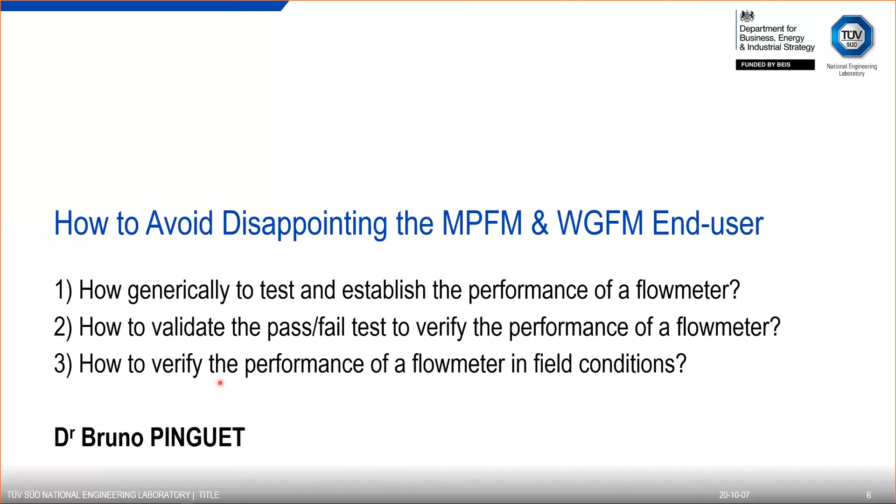So as Marietta said, I will introduce myself. I've been in this business of multi-phase for the last 30 years, and I've had two professional lives: 26 years with one company, and 4 years with NEL right now. Before going further, everything that will be said today, if there is some mistake, it's my fault. It's definitely not something related to TÜV SÜD. It happens that I make mistakes.

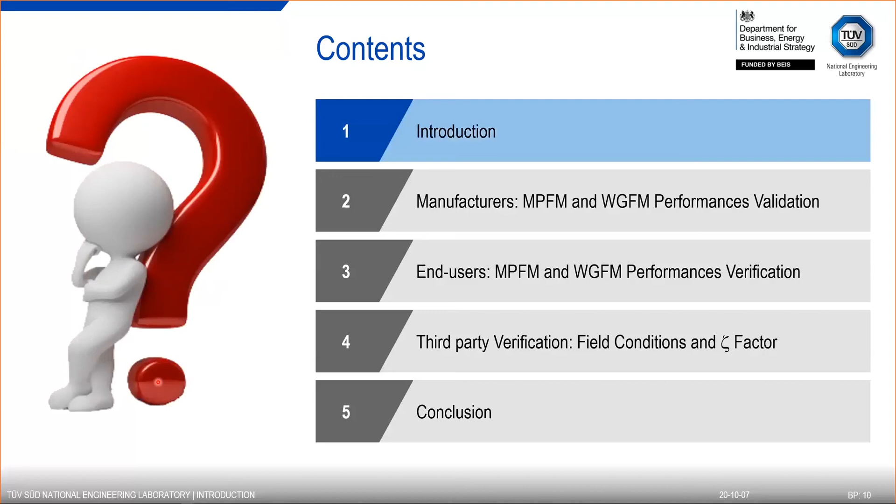So I have three main topics. One is what the manufacturer should do in order to establish the performance of a multi-phase flow meter or wet gas flow meter. Very often I will use multi-phase flow meter, and sometimes you will see MFM, but it's either one or the other. The third bullet will be for the end user, and after that we look at the verification in the field and then a conclusion. So let's go through the first part and an introduction.

The first question you may have is, why do we need to test a multi-phase flow meter? It could be well established like a Coriolis or some other equipment. Unfortunately, multi-phase flow meters are small equipment in general; they compete against a separator and need to be more compact. Inside this small space you have a lot of technology: electromagnetic, nuclear, electrical, optical, all combined together, and it's far from easy to understand the entire system, how it can deviate, or establish a proper propagation of error. So you will need to do a test one way or another.

Convinced or not, you can take it a different way. For example, there is an ISO standard associated with the Venturi, ISO 5167, but it's related to one phase and not two or three phases like you have in multi-phase. Same story with the Coriolis. It was developed for one phase, tested and improved for two phases, but in some cases we have three phases and people try to make the Coriolis work for three phases. So sometimes it's not new technology combined together, it's very well-known technology extended beyond its normal conditions.

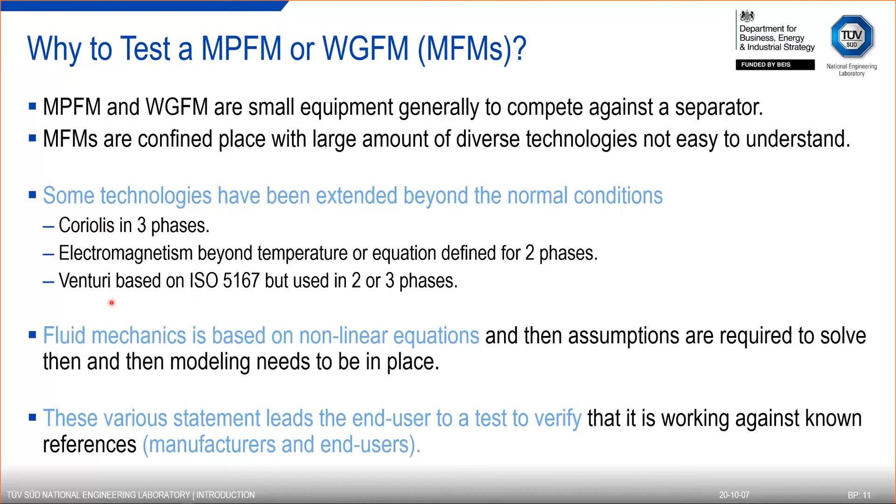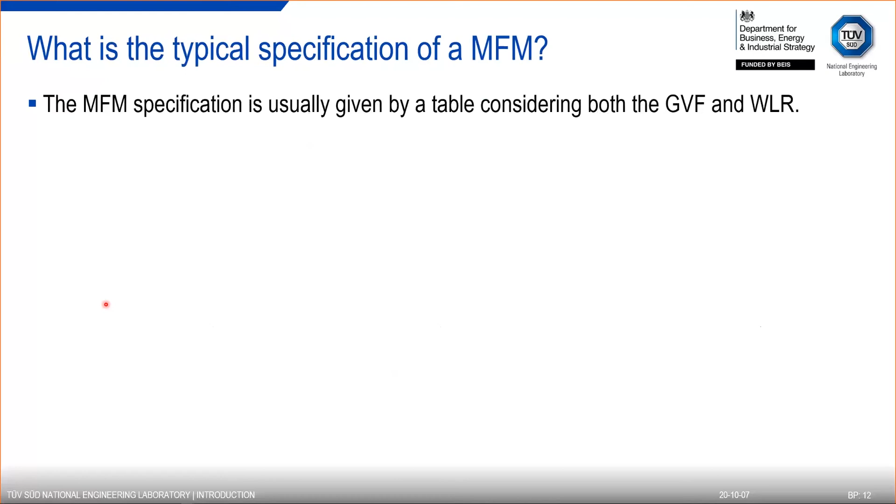So the specification of a multi-phase flow meter will be established by having some range of gas volume fraction, GVF, which we may see again in my slides, and water liquid ratio, WLR. Following the range of these two parameters, they will be able to establish a performance, let's say, between 20 and 30% GVF and between 50 and 100% WLR. The specification on the oil flow rate could be 5% or something like that.

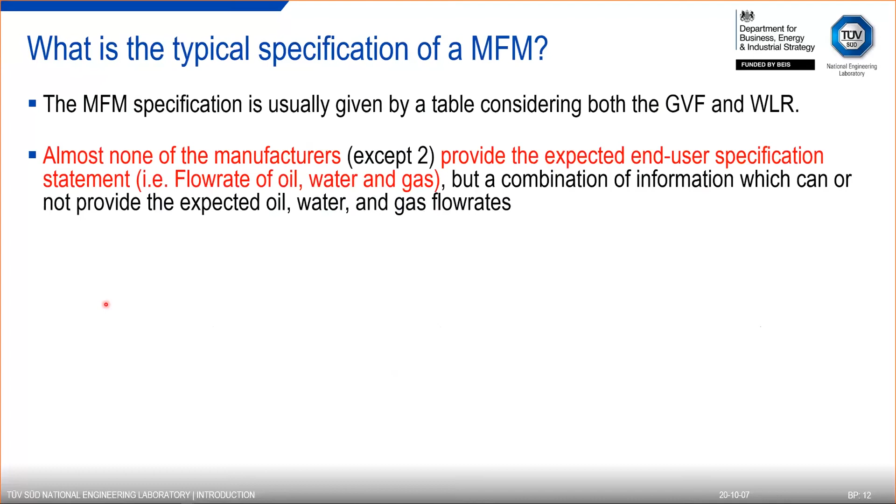Unfortunately, what I was telling you is far from right. Most of the manufacturers on the market today are not giving the specification the end user expected. The end user wants what? The oil flow rate, the water flow rate, and the gas flow rate. This is what is used with a separator, and this is how the allocation is done. Unfortunately, for some reason that we will not discuss here, manufacturers are giving a combination of parameters, and the end user will need to establish the proper statement in terms of oil, gas, and water flow rate.

I show you some types of specification. I'm listing here four of them, which are quite well known among all the manufacturers on the market today. As I said, there are only two, as far as I can see, which are providing the gas, the water, and the oil flow rate as expected. I call them type 1 specification. Type 2, which is a larger one, is based on gas flow rate, liquid flow rate, and water liquid ratio. Type 3 is gas flow rate and a mass of hydrocarbon. We need to be careful here. We're talking about a mass, and we have the water volume fraction, and we have type 4,

and we have type 5. I show you here how you need to do the calculation if you want to get access to the oil flow rate, gas flow rate, and water flow rate if you were with a type 4, for example. So you will need to get access to the density of oil and the density of gas, and manipulating the specification given by a manufacturer, you will be able to access the statement that you want.

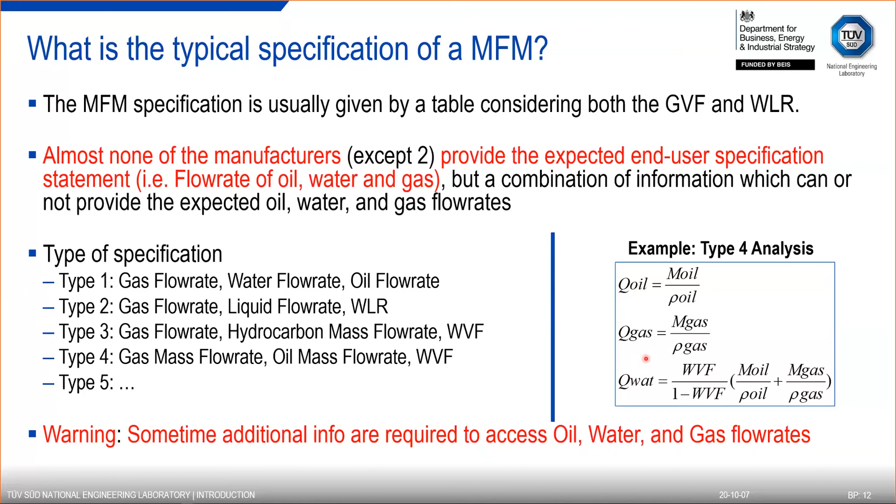So how does a multi-phase flow meter work? All these multi-phase flow meters, even if they are complex to understand, are based on the same concept. You will need to have some information to set the meter. It could be the salinity, the density of oil, the density of the water, the density of gas, and obviously the pressure and the temperature in order to be able to do the conversion from standard or ambient condition to line condition. And then you will have some other information.

Very often you will have the differential pressure measurement. Most of the manufacturers on the market today use a Venturi in one way or another. Some may use a Coriolis. In this case, it's slightly different, but these are all the input parameters that you will have. So this is what we have on the left side of this slide. And we need to achieve this for the end user, which is a flow rate at standard condition. And how do you go from the left to the bottom right?

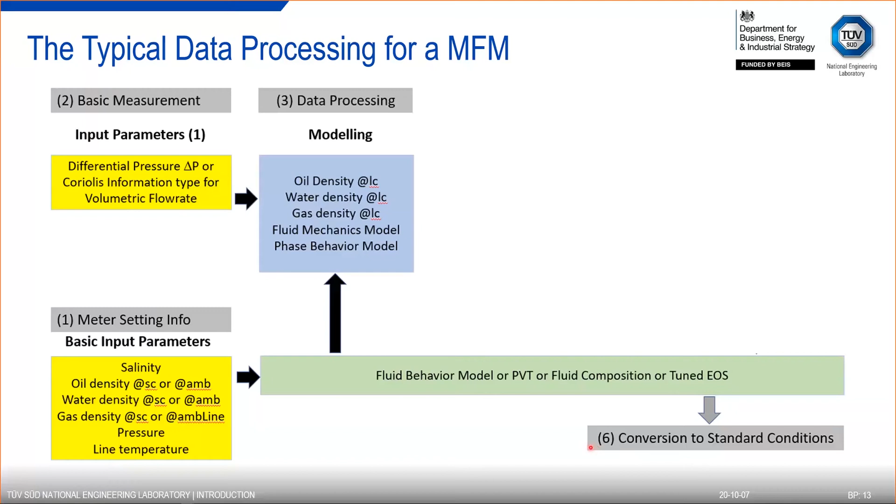It will be obviously by combining the information that you have, converting it to line condition. So this is a bit of data processing. Each manufacturer will have his own model for the fluid mechanics. You need to use some equation of state or phase behavior, like I said here, and then by crunching these things you will be able to get access to the flow rates at line condition: mass flow rates, liquid, gas, and so on. It depends on the technology that you have and how they combine them.

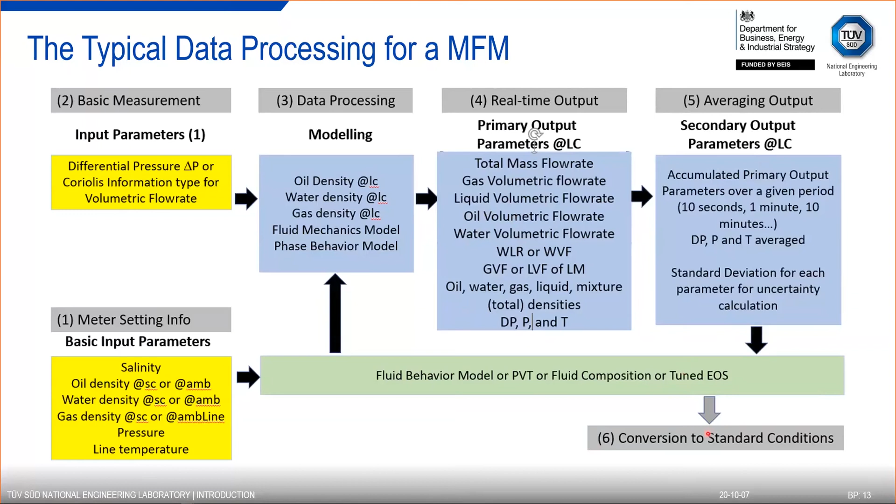And then there is an averaging to do, obviously, because the data acquisition frequency will be quite high to be able to handle the type of fluid passing inside your pipe, which is quite often unstable flow. You do this averaging, and then you will use an equation of state again to do the conversion to standard conditions. So this is what you need to have in mind when we are talking about a multi-phase flow meter or a wet gas flow meter. So the next thing the manufacturers want to do will be to establish the uncertainty of this equipment.

So how do we establish the uncertainty of an equipment? The first thing is we need to understand that an uncertainty should be based on 2 variables. I'm taking here the gas flow rate, it will be based on an error on a percentage of the reading. So let's imagine here I have been calculating and reading X, which is a value of gas flow rate, I will multiply it by this specification or this uncertainty in percentage, and this will give me a number, or it will be an absolute value. It will be always one or the other.

The differential pressure measurement is based on the same techniques. So I give you an example here. For example, in this case, let's imagine we have a relative error of 3%, which is a statement made by a manufacturer, and we have a cutoff at 5 cubic meters per hour, and the gas flow rate will be the max of one or the other.

Very, very often, when I'm auditing equipment, I see that this one is missing here. There is always a suspicion when I see these things. It means for me that this equipment has not been tested on the full range that probably it's claimed by this manufacturer. There will be always a cutoff somewhere, especially when you go to the low value, in this case of gas flow rate. You cannot maintain an uncertainty of 3% on the full range, and you need to have this kind of cutoff.

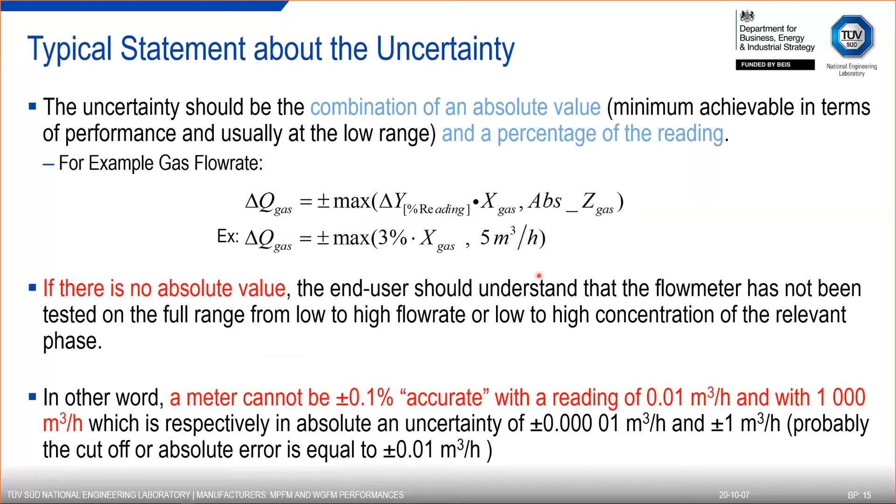This is what I'm saying with these last bullet points on this slide, where I say, let's imagine that I have a flow rate between 0.01 cubic meters per hour and 1,000 cubic meters per hour. And if someone is claiming 0.1% accuracy, or uncertainty is the right word here, it means that he is capable to have an uncertainty of this value for one case and this value in the other case. And you can see that these numbers are way too different, and this will never happen. Okay. So keep in mind, when you develop a specification, you should have a cutoff, and essentially this cutoff is for low flow rate.

Now, we have established how we should write this specification or this uncertainty, and what are the ingredients that we'll need to use to establish this uncertainty. And there are few of them, and the main ones, the 8 of them, as I mentioned here, are here. You need to take into account the repeatability of your equipment, and we will see a bit later why it's so important to have information about the uncertainty associated with the repeatability. We have the reproducibility. We have a stability, and this is something that you build over the time.

You may have a bias. Obviously, if you develop correctly the system, the bias will be zero. There will be a drift that will happen in your system over time, and there is also a way to handle it. There is a resolution on the equipment that you are using. Very often today, the resolution is extremely good, so this number will be close to zero most of the time. And you will need to take into account the uncertainty and the stability of the equipment that you are using to establish the uncertainty on your multi-phase flow meter or wet gas flow meter.

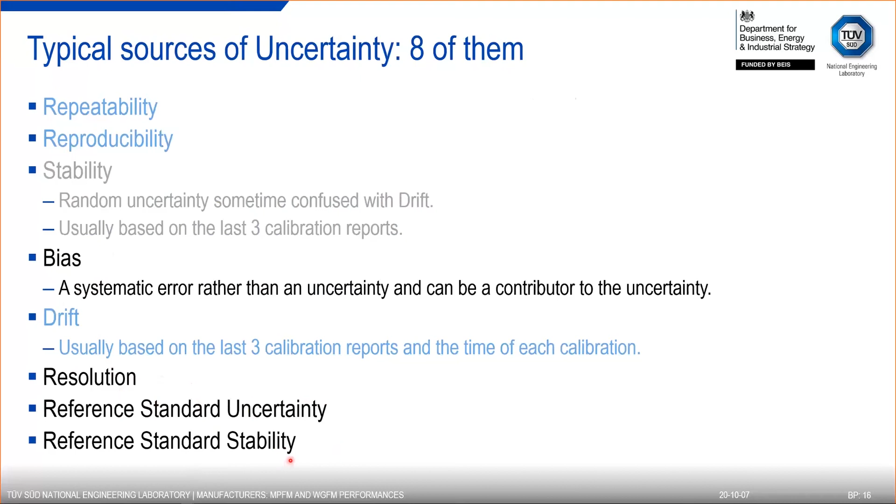Usually, this number here will be also extremely small and will not affect drastically the overall uncertainty on your equipment. However, this value here will not be small when we are in the field, and we need to keep this in mind when we will reach the end of this presentation. So this is the first thing.

Now, there is also some statement: in order to do a comparison between the different multi-phase flow meters, okay, and establish how good one is against the other, all the uncertainty should be given with a 95% confidence level. So what is the meaning of 95% confidence level? It's in fact an expanded uncertainty, based on standard deviation. So when you are collecting data, you will be establishing the standard deviation on these points, and then you will multiply it by a K factor, coverage factor, and this coverage factor will give you a statement at 95%.

I mentioned this 95% because I still see from time to time some specification given not with 95 but with 90%. If it's not 95%, you will need to do some correction. There is a way to do it, obviously, in order to be able to compare apple to apple. Okay.

So what we will get at the end, taking into account the right type of distribution: is it normal distribution, rectangular or triangular? There are different ways to use them, but in our case, when we are establishing the gas flow rate or the oil flow rate and water flow rate at the end, the K factor here will be associated with a normal distribution, or we'll see a Z distribution, a T distribution, and this K factor here will be something around 2. I will give you exactly the number just after.

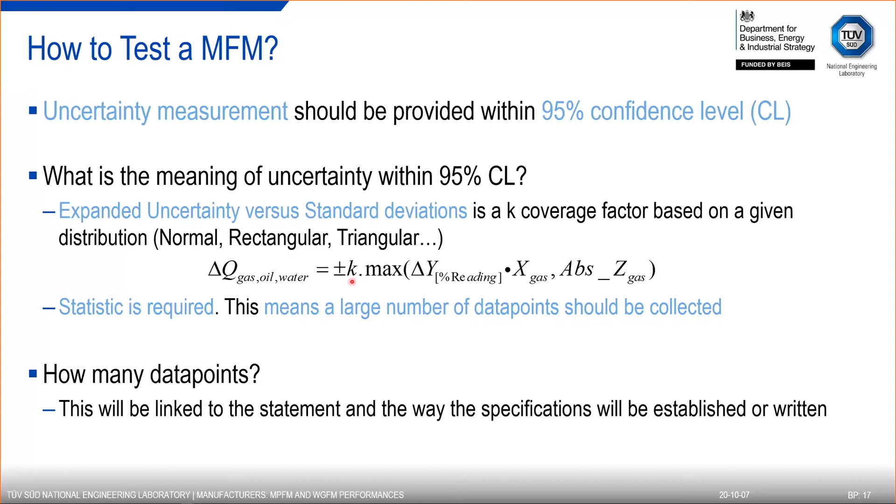Okay, so it is the statement that we have done, and we multiply it by this K factor. So it is obviously associated with some statistics, and statistics means that we need to collect a number of points, and the whole question is how many data points should we collect in order to get a proper K factor, or as small as possible this K factor here. So this is the whole idea now in the development of a specification.

I'm not drunk, you know.

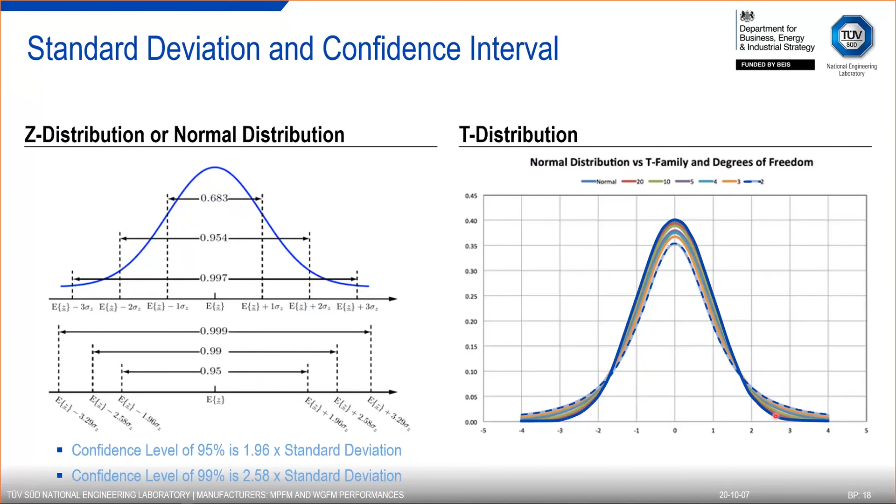And you can see these two curves are not exactly fitting on top of each other. You can see that the tail of one is much higher than the other one, and this is obviously the T distribution here against the Z distribution. So therefore, the K factor for a T distribution will be larger than for a Z distribution. And the whole idea is how large is this number, and this number depends on the degree of freedom that you will have in your system.

Okay? So, for example, imagine that you collect only 8 data points. You are very fast, and you want to get only 8 data points. The K factor that you will need to use is not 1.960, but it will be 2.306. If you collect more data, you're a bit more patient, and let's double the number, you will go to 2.12. And if you increase it again, let's say you go to 40, in this case, you are at 2.02, and you can see that you are converging step by step to the famous 1.960. So keep this in mind.

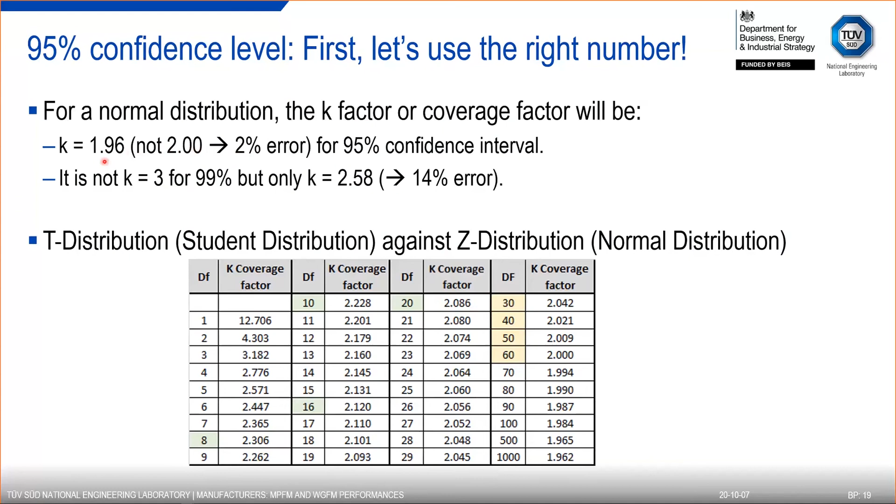When you are going to a facility, you do some tests at a given range of WLR and a given range of GVF. If you have only 20 data, the coverage factor that you will be using will be 2.086, and this will be reinforced in the near future by the different standards coming out, either the API or the ISO standard. And please keep in mind, if for one reason or another you have a lot of data, it's 1.96, it's not 2 that you should use. I have seen so many people using 2. I don't understand why people want to get an uncertainty 2% off. It's already difficult to get a small number, so use the right number when it's required.

So we have been able to establish the coverage factor. We know how to describe the uncertainty. How do we now validate this multi-phase flowrate? We will need to work in different ranges of GVF. You should collect some data in a low range of the GVF, in a medium range of the GVF, and a large range of the GVF, except if you want to sell a wet gas flow meter. In this case, you will be only in a large and very large and even higher range in terms of gas volume fraction. But in general, this is what you need to do.

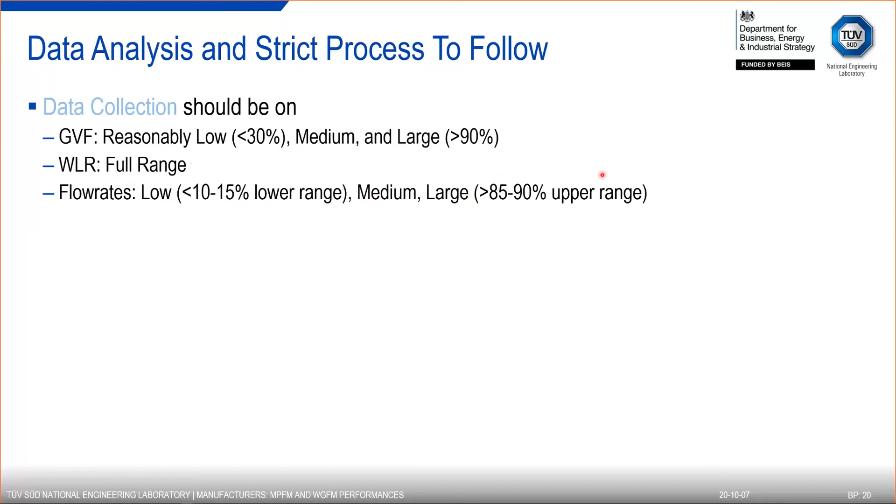In WLR, water liquid ratio, you need to address the low range, when you have a little amount of water, and you need to also address the case when you have a large amount of water inside your liquid. So you need to have the full range. And in terms of flow rates, you should not stay in a sweet spot in the middle of the range of your meter, but you need to have some data in a lower range, some in the middle, and some in an upper range. If you don't do that, when the end user is using your meter and verifying if it works, you may be surprised that suddenly you don't pass this test.

After collecting this data, I have seen some strange things happening from time to time. People try to remove some points because they believe these points are wrong. There is only one way to check if these points are wrong: to use outlier techniques. There are plenty existing. I'm using Dixon's test, but you can have others. There is Grubbs, there is Mandel, and so on. These techniques will tell you if a point is outside of the distribution, okay? In this case, you will be able to spot it, but you should not remove it just like that. You will need to understand what is the problem associated with this point.

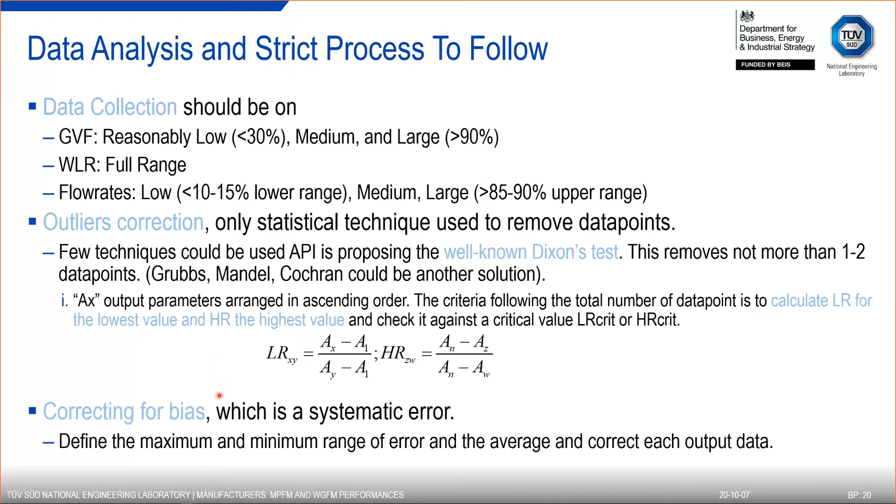Was the flow unstable and you were expecting a technology working only with stable flow? Is it a time shift between the reference and the multi-phase flow meter? There may be an explanation. Without any explanation, you should not be removing these points. Okay, and this is the only way to do it. You may have a bias in some cases. If you have a bias, it's a systematic error in the system, and this is something you can correct in order to establish the performance of your meter. You should definitely avoid having a bias in your statement.

Now, how do we do it? I'm presenting here the typical table that you have for a multi-phase flow meter. You will have a range of gas volume fraction. Here I'm presenting 4 ranges. I don't put any values here. The X, Y, Z will be defined following the technology, and you will have the WLR here, and again, I present 4 cases. So if you have 4 here and 4 there, you will have 16 boxes, and obviously you will have a statement for the relative error in percentage and for the cutoff in absolute error. So you will go from 16 to 32. In some cases, you will see these numbers are meaningless and you can remove them. But this is a way to establish the uncertainty associated with a multi-phase flow meter.

And now the trick: if you want to establish the performance in this area here, for example in yellow, at a 95% confidence level, you will need to know how many data points you have recorded in this specific range, okay? And if it's only 8, you know that the coefficient was 2.306 or something like that. We have seen it just before, and it's not 1.96. So you need to collect enough data in this domain to have a coverage factor as close as possible to 2 or 1.96. So if you have a large description in terms of range of GVF and WLR, you need to collect a lot of data to establish a proper uncertainty and performance for your multi-phase flow meter.

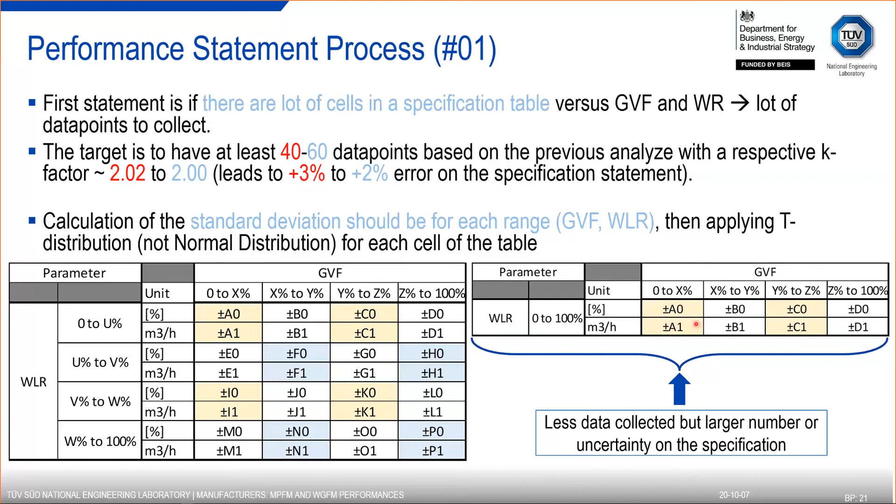Obviously, someone which is capable to state a statement versus gas volume fraction, for example, whatever the WLR between 0 and 100%, will need to collect less data. In this case, you have only 4 options, and you will need to collect enough data in each area, and you can have a better statistic. Probably it will be slightly larger than this one here, where you have a lot of split, but this is a way, I can say, to improve the statement or the value of the K factor. Okay, this is up to each manufacturer.

And if you start to look at the ISO and API and the new one that will be coming out, they want to get access to the repeatability, the reproducibility, the drift, but also, it is mentioned, the sensitivity that this system will have to some change. Could be a presence of solids, unfortunately, time to time, or salinity change, or probably chemicals to avoid hydrates or wax deposition and so on. So you need also to establish what is the uncertainty or the sensitivity that you will have to these parameters.

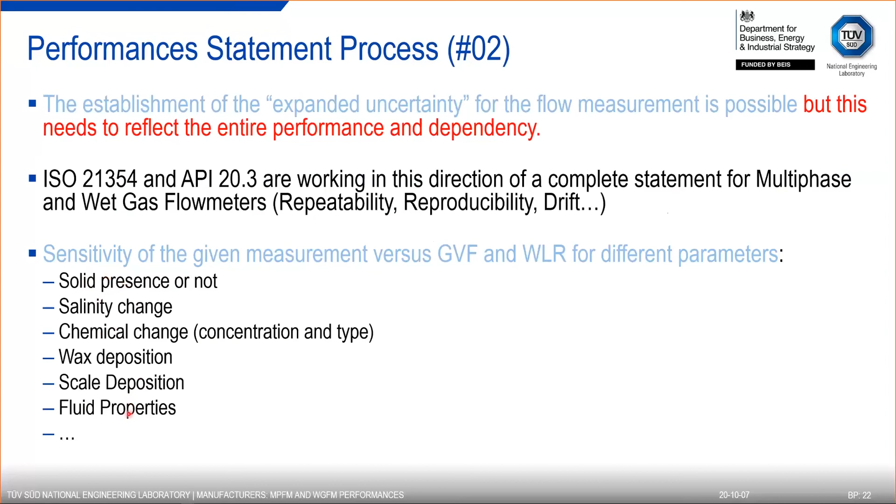Okay, and don't be surprised if you see over the next years these things coming more and more in demand for the manufacturers. This will be the way to establish properly the performance.

I talk a lot about the repeatability and reproducibility, and I wanted to tell you how we calculate the repeatability of an equipment. You will say it's quite easy. You take one day, and you collect some points at the same condition, and you do it at different times, and then you use the standard deviation, and then you use this equation here, and you get access to your repeatability. This obviously is a way to do it.

The repeatability should not be confused with reproducibility. So it means you do a repeatability by switching off your meter, touching nothing, switching on again your meter, and looking at the performance. And you can do it a few times. Here, for example, I have 5 dots, so it means that in this case we have been doing it 5 times. And the higher this number, the better will be your statistic, because the number n is coming up here.

The reproducibility is slightly different. You record in condition 1, for example, on day number 2 here, and you do it on the same condition on day number 3 and 4 and 5, and then you have now 4 points, which are reproducibility of one against the other, and then you can start to establish the reproducibility for this one, and you do it for all of them. And at the end of the day, it's exactly the same type of equation that you have. The way to calculate it is slightly different, but you obtain the same value here.

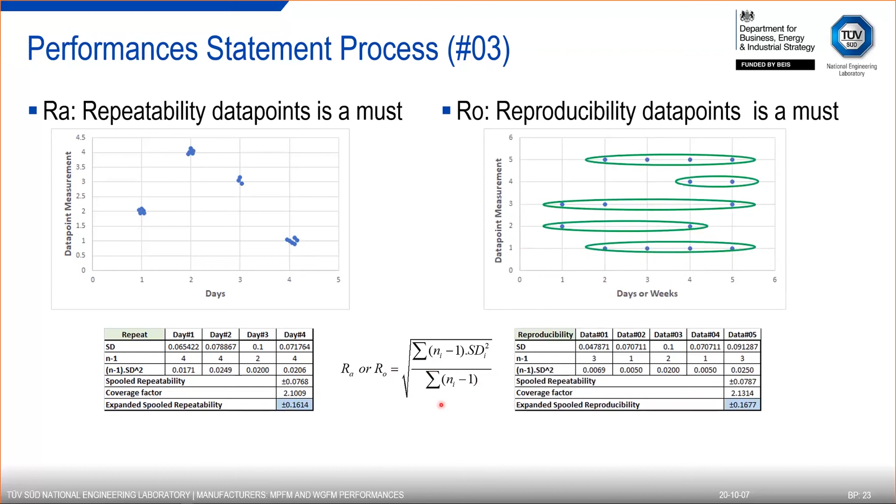So we have access to the repeatability, we have access to the reproducibility, and we will need to see why it's so important. It's important to establish the performance, but it's also important from the end user point of view.

We have been spending almost half an hour together right now, 25 minutes, and I wanted just to make a break, and you may remember what Donald Rumsfeld was saying in 2002: we have some unknowns, and we may know some unknowns, or there are things that we know and we don't know, and this is what we want to try to address in this section.

So the first thing that needs to be clear, and now we are not anymore with the mindset of a manufacturer, we are with the mindset of the end user. Very often the end user, before buying or when he is buying this multi-phase flow meter or WGFMS flow meter, wants to do a test. And he needs to understand, I put it in red, that the purpose of this test is not to establish the performance of the flow meter. Not at all. It's to check if the multi-phase flow meter is within the given specification that the manufacturer has been providing. Okay?

And it's nothing else than that. It should not be too complex, if I can say that, and we will need to look at how we can handle these things. Obviously, it will be important to do it, as I said, in a low range of the meter, in a medium range of the meter, and an upper range of this meter, as described earlier.

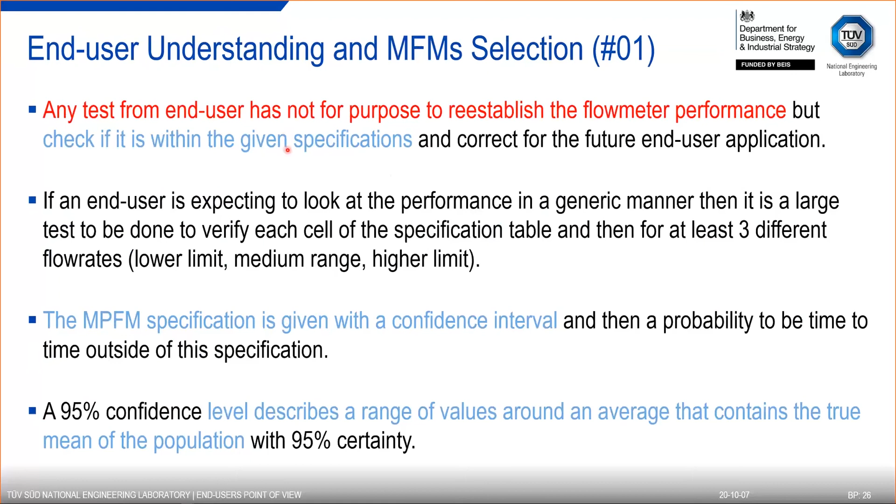So time to time it can be out, but when it is out, it doesn't mean it's wrong. You need to look from a statistical point of view at how often it's out, and if it's too much out, obviously the claim in terms of specification from the manufacturer is wrong or is not fit for the application that you have.

Okay. So back to what I said earlier, from an end user point of view now, we want to look not at the mass flow rate of the oil or the hydrocarbon, we want to look at the performance associated with the oil flow rate, the water flow rate, and the gas flow rate. So the first thing, if you are not type 1 but type 2, type 3, or type 4, someone will need to help you do the calculation of the flow rates and the uncertainty associated with these flow rates, okay?

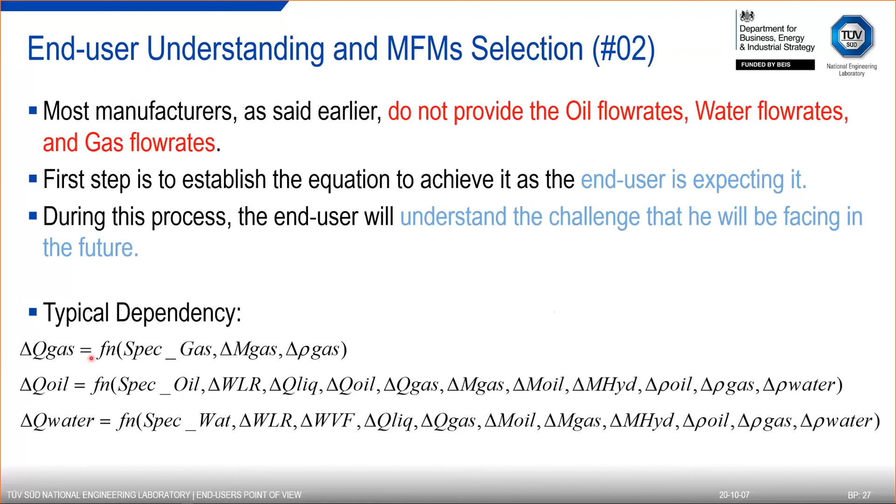I'm giving you here, in a generic manner, how the gas flow rate, the oil flow rate and the water flow rate depend on some parameters, following if it's a type 1, type 2, 3 or 4 specification. We are not going through the full description in this hour, but let's imagine I have a specification associated with the gas flow rate, the liquid flow rate, and the WLR. I will obviously have the gas flow rate uncertainty immediately. This is provided by the specification of the manufacturer.

But to get access to the oil flow rate, I will need to use the uncertainty from the WLR and the uncertainty from the liquid and calculate what is the oil flow rate, what is the water flow rate, and what is the uncertainty associated with the oil and water flow rate. And this is what I want to highlight here. Okay.

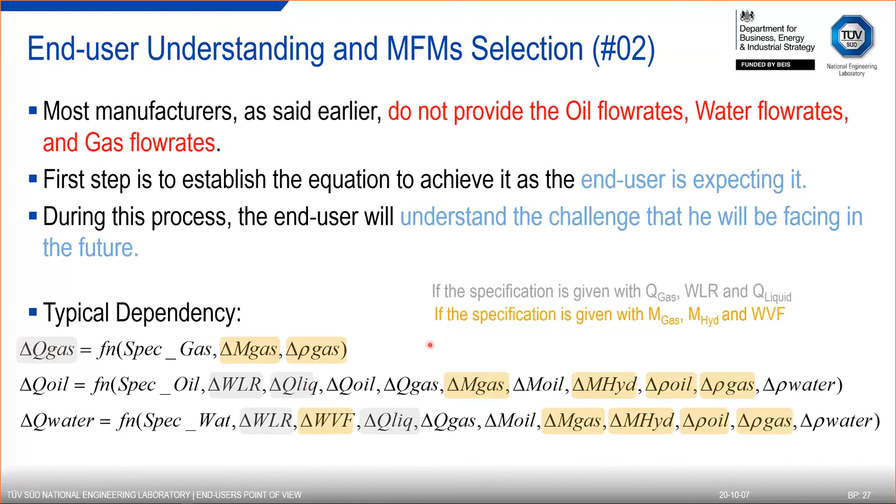If you have a type 4, you can start to see that it's a bit more complex, it's in orange here, and you can see that you need 2 parameters for the volumetric gas flow rate uncertainty, and you will need to use 4 for the oil flow rate and 5 for the water flow rate, and the uncertainty associated with that. So the equation can quickly become large.

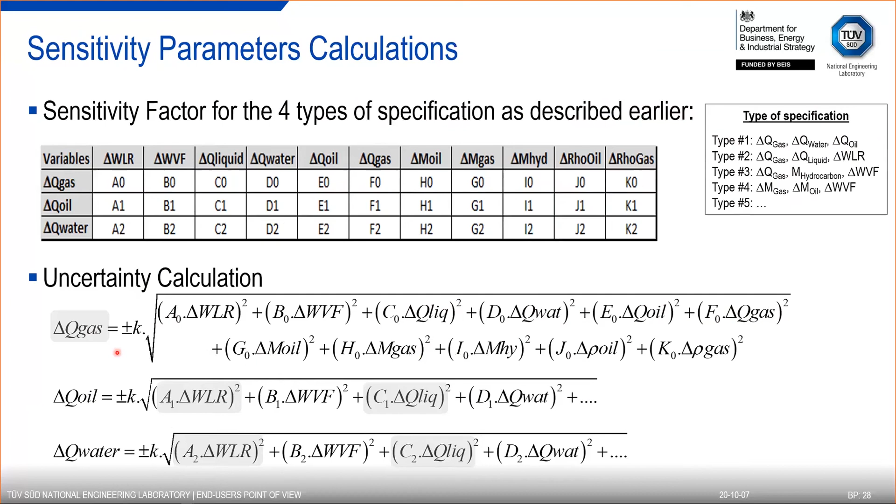We use a technique which is generic, whatever the type of specification that you have. I remind you here what are the types of specifications that we are talking about, following the claim or the statement from the manufacturers. And I'm giving you here the way the calculation will be done, okay? The purpose is not to spend time explaining these things, but there is a technique to do the calculation. And we use, in our case, a table concept. There are different types of table concept.

We introduce here the different parameters that you have and the values associated with these parameters. Sometimes it's 0 because you don't use some of these parameters. For example, if I was with WLR, liquid, and gas, I will have only 3 lines here that will be used. All the others will be at 0. And then we take the uncertainty given by the manufacturer and calculate the absolute error for the given value.

Then we are using the probability here, it will be the normal distribution, so the divisor will be 1.96. We calculate the standard deviation for this statement. Remember, if you were with a manufacturer which is not giving you 95% but 90%, the coefficient here will be slightly different.

And the division here will be obviously different. You need to calculate the sensitivity factor. This is what takes a bit of time to establish. And then you multiply this column by this one, you get your uncorrelated product. If you have done a proper work, there is no correlated product in your system, and then you can calculate the variance. Adding the variance, you do the sum of your variance, and then you take the square root, okay?

And you need to establish at 95%, it goes this way. So you have the square root, you will divide the square root by 1, so you get this number here. And then you will need to establish the normal distribution at 95%, so you will need to multiply by 1.96. Oops. And then this is what you are obtaining here. You will get your uncertainty, the absolute one and the relative one, for the given value that you have.

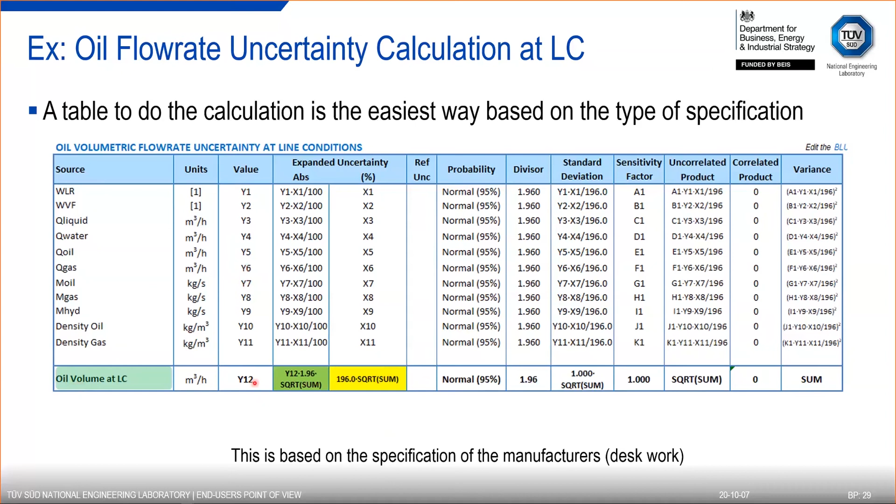In this case, I took an example with oil volume at line condition. So based on the statement from the manufacturer, you are capable to establish the uncertainty associated with the oil. Here, you will have the same thing with the water and the same thing with the gas. Obviously, we have been taking into account only the specification for the moment.

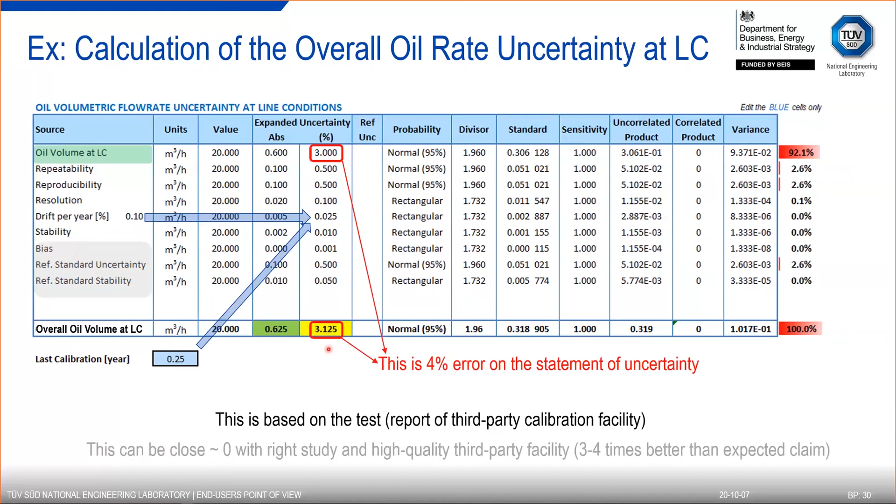We have been able to establish the uncertainty from the end user point of view. Now we need to establish the criteria that the meter should face, in order to state if it passes or fails. I say it again, several times here. The uncertainty of the meter is given with a confidence level of 95%. So in red, I say it will not be 100% inside the specification. So it's not because you record 12 points and there is one out that the meter is out. No, it's not that way. You need to look at how the system behaves.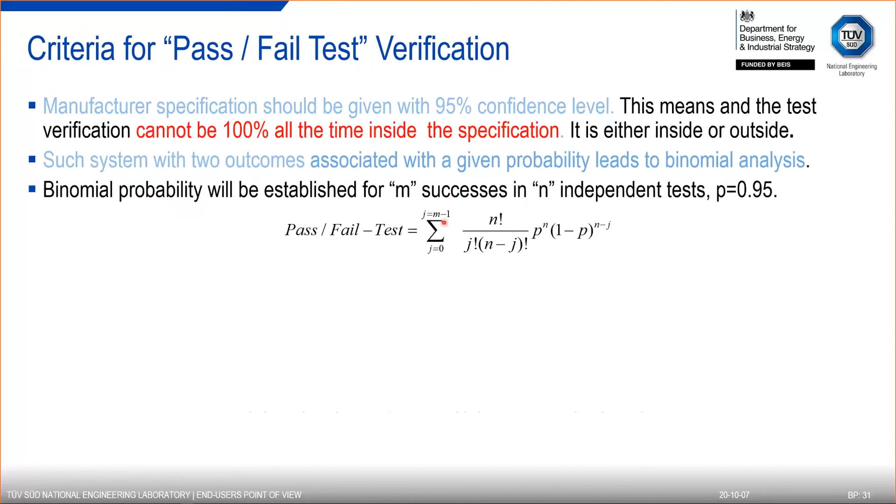What do we have in our system? Either it's inside the specification or it is outside. We have a probability. The probability is given, it's 95%. And you may remember from your school, in this case, when you have such a concept, you will need to use a binomial law or some analysis associated with a binomial probability. And I give you here the formula that needs to be applied, where N is representing the number of tests and M is representing the success. So you are within the specification given by the manufacturer, or that you have been calculating yourself. And then you need to establish the failure criteria. So this is quite simple.

I give you here, for example, for 2 tests, 3 tests, 4 tests, 20 tests, 21, 30 tests, what is the maximum failure that you can accept before saying that the meter failed to pass this test. So let's imagine you have been recording 20 points, okay? You should not have more than 2 points outside the specification in order to declare that this meter is good for your application or passes the test, okay? So this is what is important to remember.

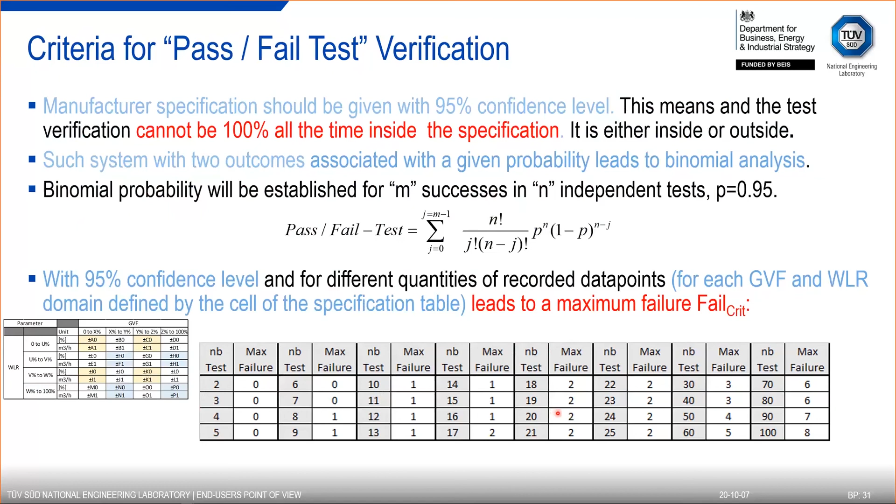You are not going to state if the meter is within or rewriting the specification of the manufacturer. This has been done by the manufacturer at a given time. You are, as an end user on the facility, looking if the meter is within the specification given by the manufacturer with this uncertainty and the confidence level associated with this uncertainty. Okay? And this is the way to do it.

Now, and this is the last step. Very often, you buy the meter and you want to check how this meter is performing when you are in a field condition, or you want to verify it, or probably the person in charge of the operation is not comfortable with this system and doesn't believe that suddenly there is so much water coming out of this well, and then the comparison will be necessary.

So before we look at the formula that you should apply, we need to look at what you should do in a field condition. Now we're in a field condition, okay, and this is the end user. Probably the end user will ask the manufacturer to be around, but he can do this test without him for sure.

I'm highlighting in color what is repeatability, what is reproducibility, and what will be accuracy, or high accuracy or low uncertainty on your measurement. And I'm showing you the main type of application where I have seen multi-phase flow meter and wet gas flow meter used. Obviously the main one is well allocation. You have a multi-phase flow meter installed on each well, and you look at the production from this well. And I'm highlighting in green what is associated with repeatability, and in orange with reproducibility.

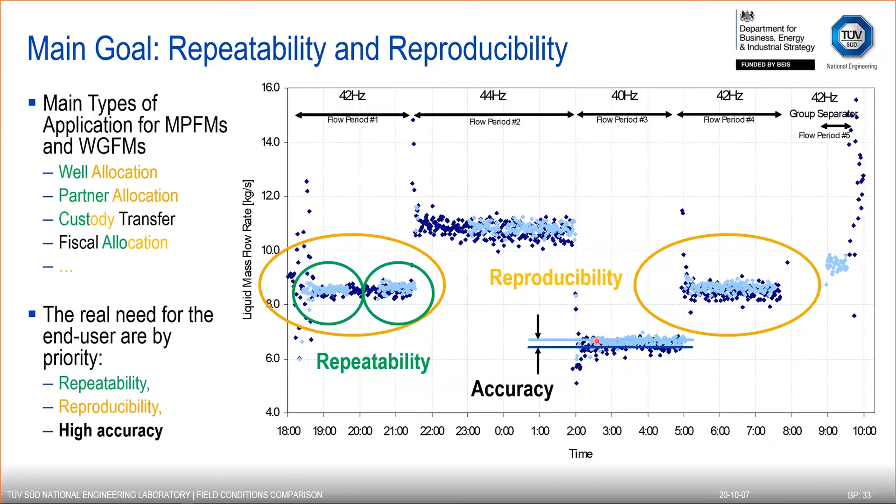If you don't read the same thing, in this case, you are lost in terms of measurement, and you cannot improve or optimize your production. And then, obviously, after you look at each recording, you need to look at the difference, or the accuracy, that you have between the data you're collecting with a separator and the data you are collecting with a multi-phase flow meter. So these are really the things you need to have in mind as soon as you want to do a comparison. Before even looking at the data, you need to look at this repeatability and reproducibility.

Now, to do this in-situ verification in a field, there are a few statements that you need to have, which were applied in the data that I've been presenting just before. First, you need to be sure that your two equipment are physically close to each other. I've seen people trying to do an allocation with 20 kilometers between them. No way you will be able to do it properly. The idea is you will have a pressure and temperature which are quite similar, and it will be easier to see if one is deviating from the other one.

You need to do the recording at the same time. I have seen cases where they say, well, Bruno, we are recording this data today with a separator, and tomorrow we will have the same thing with a multi-phase flow meter. No, I don't know what will happen between one day and the other. It's a recording at the same time.

You also need to have the same PVT package. I have seen cases where I have a separator with one PVT package and a multi-phase flow meter with another PVT package, and I was told to do a comparison at standard condition. Obviously, if you don't have the same PVT package, you are introducing some error, and then you may conclude at the end that they are not matching. The two data are not matching, but I don't know which one is right. Some people will say, oh yeah, but I've been using this meter for so long that I know this one is right. No, there is no way to state that.

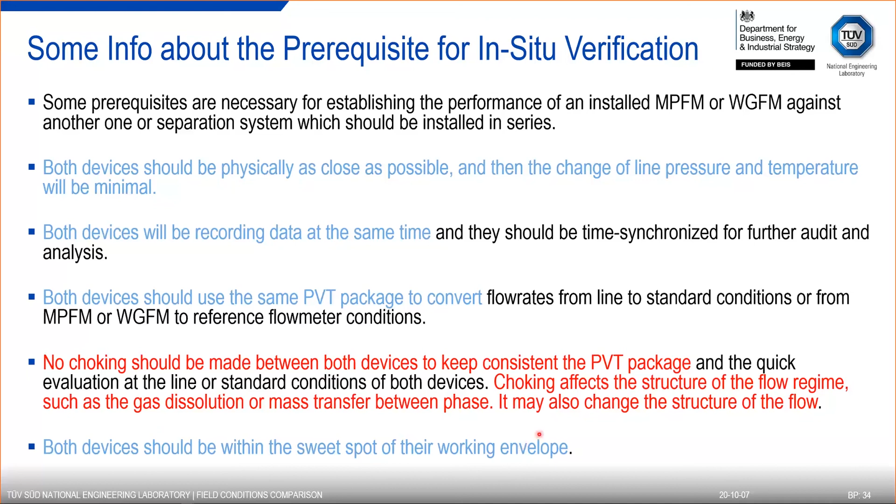And finally, let's be sure that the two equipment are in a sweet spot. You are not working outside of the range of a separator. For example, you have a tiny separator and large production, you will obviously have carry over or carry under, and in this case, you will not be able to establish the performance properly.

Now that we have these things in mind, to be able to state that we can start a comparison, we need to be sure that we have a level of stability in the flow, for a given choke, for example, or a gas lift condition. The idea here is to find something generic, which is not specific to a multi-phase flow meter, but generic to some basic measurements that you are doing in the field. What we use is a pressure sensor, a temperature sensor, and the differential pressure. As I said earlier, most of these manufacturers are using a Venturi, and if they are not using a Venturi, we can have a Delta P installed somewhere.

The idea is we will be looking at the noise from the flow on a short period of time; we select 10 or 60 seconds. We need something which is not too long. So we will have the root mean square of this pressure, and we will look at it against an average of the pressure taken over a longer period, which could be 10 minutes, or 20 minutes if you want. The idea is to look at the noise, or the fluctuation that you have in your flow, against a very stable value.

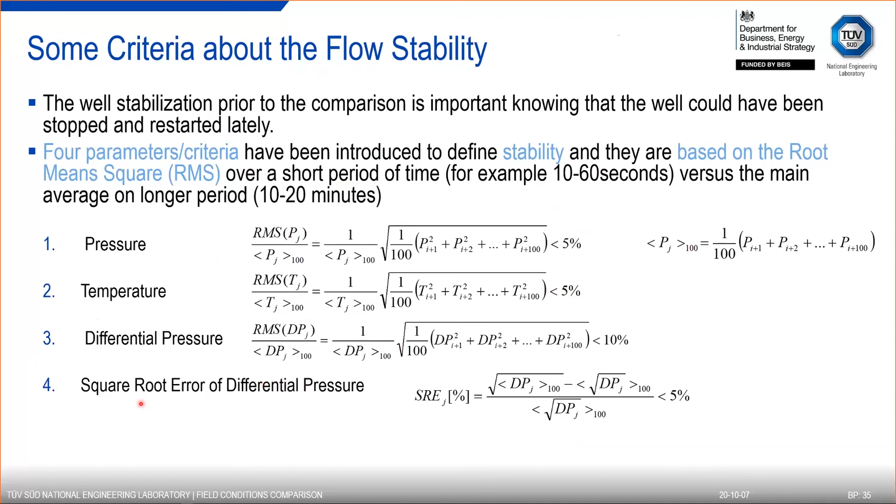So these are the four criteria and nothing else, and you can see it's very simple. Nothing is associated with the technology, no electromagnetics, no nuclear, nothing like that. It's purely what you have in your well. Okay. Things again that I want to say: when you do a comparison, don't start to do a comparison of a multi-phase flow meter with an equipment where you are only taking some samples. Okay. This is quite amazing.

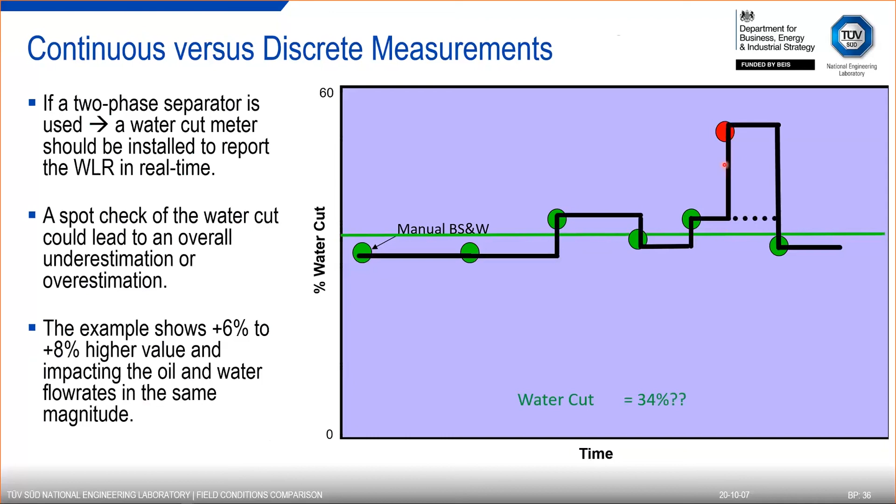I have seen, and I am presenting a real case here, where we have a time and samples were taken, you can imagine from a separator, and you have these 7 points here. And what do you do? You have 6 which seem okay, and you have 1 which you may remove if you want, because you say it's a bit too high, or if you take into account all of them, you get this water cut now not at 34%, but 36%.

And if you look at what was happening with a continuous recording, and I show you that here, you can see that it was neither 34 nor 36, it was 42%, and obviously you can see 6 to 8% difference, and this is what you will have on your oil flow rate and water flow rate. So please be sure when you do a verification in a field, all the equipment nowadays have a digital opportunity, and you should be able to use such concept.

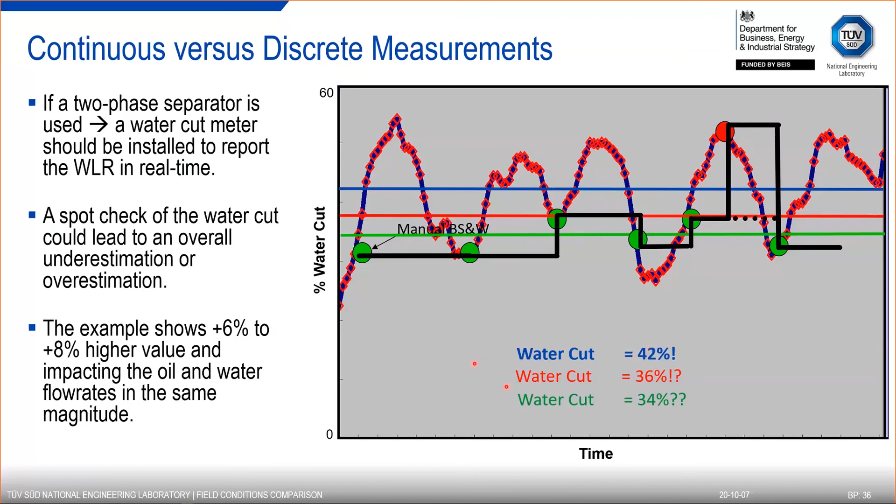Okay. Keep in mind also that some of the parameters that we are using are a ratio. Okay, and the product of an average is not an average of a product. Very often I see people calculating an average WLR by doing the average of each WLR. No, this is not the way to do it. The way is to come back to the definition, and the WLR is the sum of the volume of water divided by the sum of liquid, or the flow rate if you want in your case, and this is how you do it.

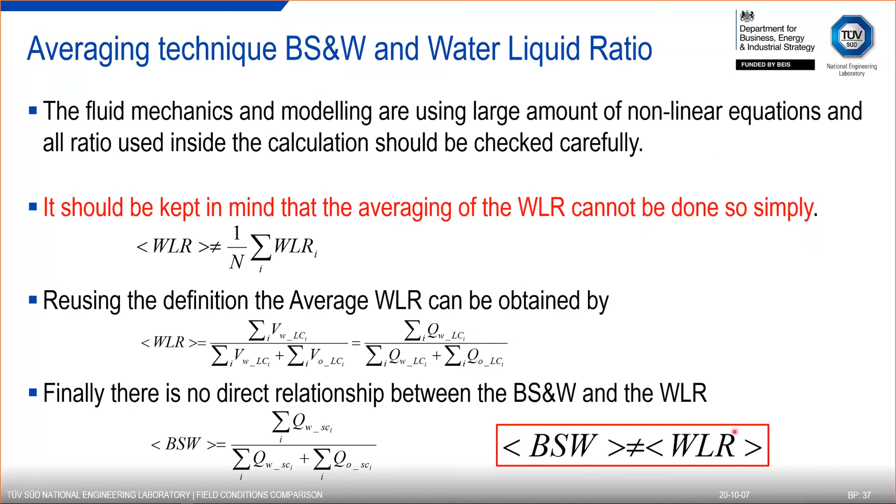And also keep in mind, a water-liquid ratio is not what sometimes I see, water cut or BS&W at standard conditions. They are not the same thing. If you look here, you can see it's the water at line condition, here the water at standard condition, and the same thing in the bottom. So there is, as you know, some shrinkage happening. You have some gas at line condition that will come out. So the oil flow rate that you have here at line condition is larger than the oil flow rate you have at standard condition. So there is no way to look at BS&W from samples, for example, against a WLR from a multi-phase flow meter. These are the basic things that you need to avoid.

Okay. So the goal of the test now, I hope you understand it, we will need to have some repeatability, some reproducibility. We need to look at a lower range of the expectation of this well or this field, a large range also to be sure that it works, and obviously something in the middle. Okay. So we are here now.

We have this meter. We have done all this collection of data. We know that there is an uncertainty now associated with the multi-phase flow meter, but there is one which is also associated with the reference meter. Is it another multi-phase flow meter? Is it a separator? They have an uncertainty, and the uncertainty of both of them is comparable here.

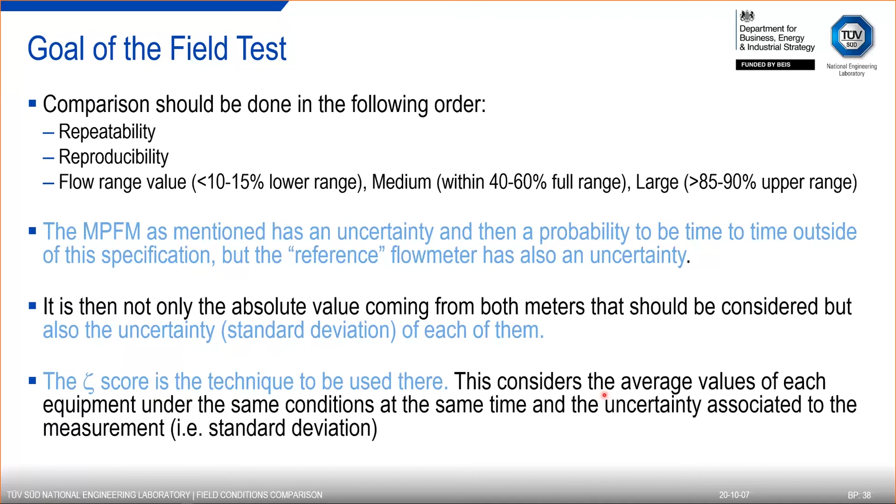So you are not in the previous case from the beginning of my presentation, where you had a high quality reference on the flow loop, and therefore you could disregard the uncertainty coming from the reference meter. Here you need to have a system in place capable of taking into account the uncertainty of both pieces of equipment in order to say if the values that you are getting are comparable or not.

And the first thing that I say on the top, before showing you the equation, is probably the most important thing here: have a third party involved, because obviously you have the buyer on one side, the end user, you have the seller, the manufacturer, on the other side, and you will have the third party, maybe with a separator or another meter, and then it will start to be a fight everywhere. So get someone in the middle that has the competency to handle this situation in terms of knowledge.

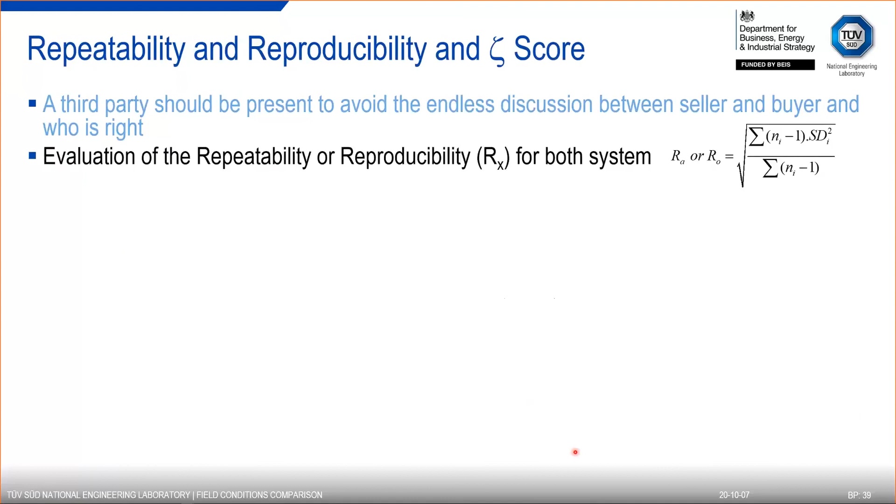Okay. So we know how to calculate the repeatability and the reproducibility, and now, and it's almost the end of my presentation, you will calculate what we call a zeta factor. The zeta factor will be the reading, the average that you will have for one given point from the multi-phase flow meter against the so-called reference, could be a separator, could be another multi-phase flow meter. But what is important, you don't look at the difference, you look at the difference divided by the uncertainty that you have on your multi-phase flow meter and the uncertainty that you have on your reference measurement, plus the repeatability and the reproducibility of each of them.

And this will give you a number. This number will go from 0 to 10 to whatever, there is no limit. Often you will be between 0 and 5 probably, and I'm giving you here how it's working. So if you have a zeta factor of 0, it means these two values on average are perfect, so it's excellent. If it's below 1, it's excellent, and if you reach the value 2, it's still passing. So this value here, the ratio of both, is giving you 2.

It's okay. When it's between 2 and 3, it's doubtful. You need to look a bit at what's happening, and definitely when it's above 3, you fail. So the comparison between both is not correct. The system doesn't tell you that this one is right and this one is wrong. It's just telling you that the system made with these two measurements provides inconsistent values.

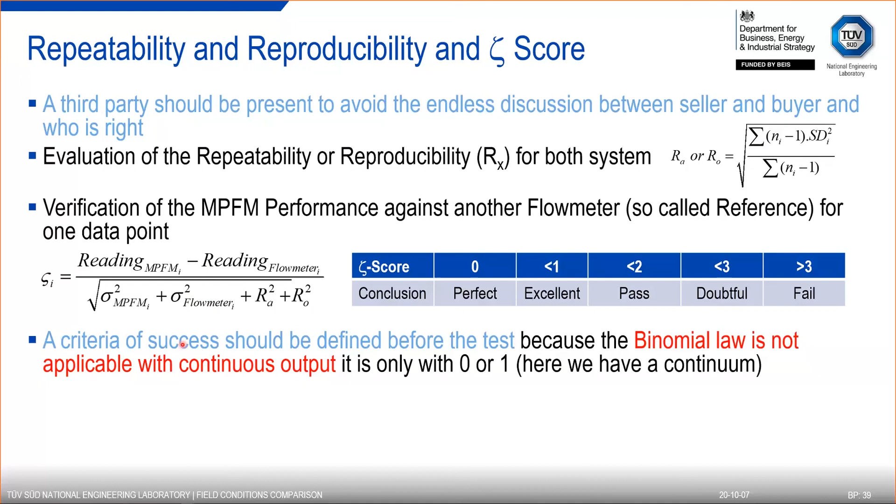Obviously, this zeta factor is a continuous value. It's not 0 or 1, and you cannot use the binomial law here like I presented earlier. So you need to have a statement in terms of success, and this is where you can play a bit around that. The way we do it in our case, we define the zeta factor threshold as 2: are you above 2 or below 2? Okay, and now we're back to what I was saying earlier. You are in or you are out.

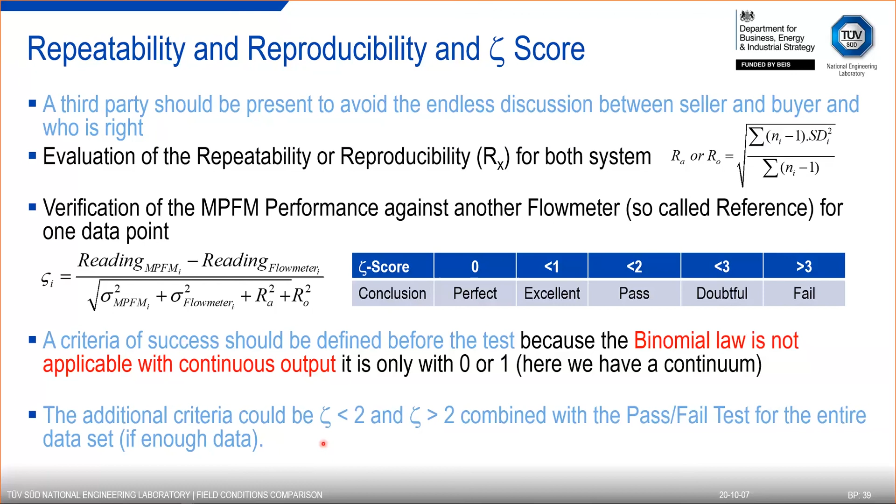You have an uncertainty associated with that, which should be 95%, and then you can reuse your binomial law as presented earlier. And you will be able to say you pass, or you verify that the meter in the field is working against what you believe is your best reference. And it could be a separator, well controlled, well refurbished, with proper equipment, Coriolis, a water cut meter in line, and things like that. Or, as I said, another multi-phase flow meter.

So I'm reaching the conclusion here, and I have 3 slides for the conclusion. One associated with the manufacturer. We have seen it earlier. Most of the manufacturers today are not providing the relevant answer for the end user, which means the uncertainty associated with oil, water, and gas.

They provide something else, and they need to be careful because with the ISO and API coming, they will be forcing them to work a bit more in this direction and look at the sensitivity parameter associated with this number. There is also repeatability and reproducibility uncertainty that needs to be stated, okay? And it's coming more and more that you need to establish the sensitivity to some parameter, salinity, for example, for electromagnetic measurement, or for some nuclear system, or chemical and things like that.

To be able to establish and evaluate the performance of a meter, you will need the repeatability, the reproducibility, the drift, the resolution, and obviously the uncertainty that you have during your test. This is what is important, and you will need to use the T distribution and not the Z distribution to establish a proper specification. And there is a way to analyze the outlier, and you don't remove an outlier because you don't like it. There is a statistical system to be used.

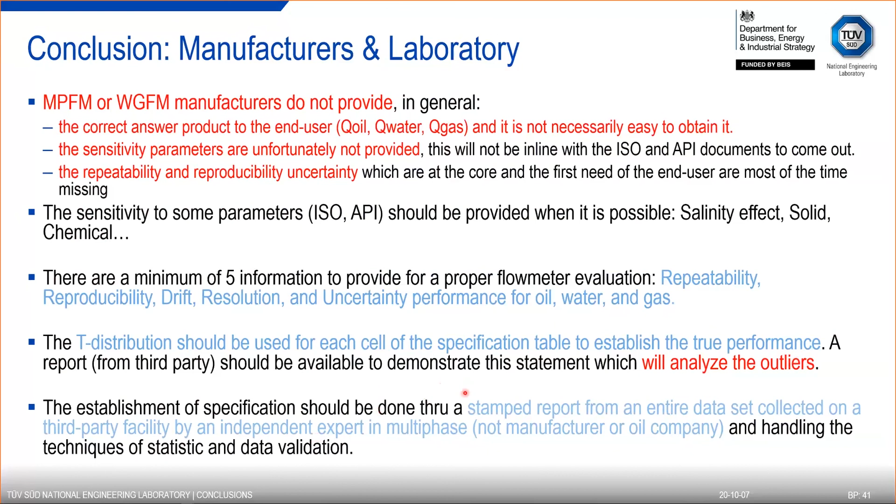And obviously, to give some value to your test, you should have this report coming from a third-party facility, and definitely not from a manufacturer flow loop or an oil company flow loop or things like that. It needs to be done in a way that it's fair and equitable for both parties, the end user and the manufacturer. Okay.

If I look at it now from the end user, to check if the meter is working, it's the concept of a pass or fail criteria that I described earlier. Obviously, you need to establish this pass and fail criteria based on oil flow rate, water flow rate, and gas flow rate, and you use the binomial law, as I said earlier. And definitely, if you are expecting as the end user to see the salinity changing in your well in the future, you should do some tests to verify how the meter will be deviating. And again, if for a reason the meter is not passing, it's better that you have a report which is stamped by a third-party facility.

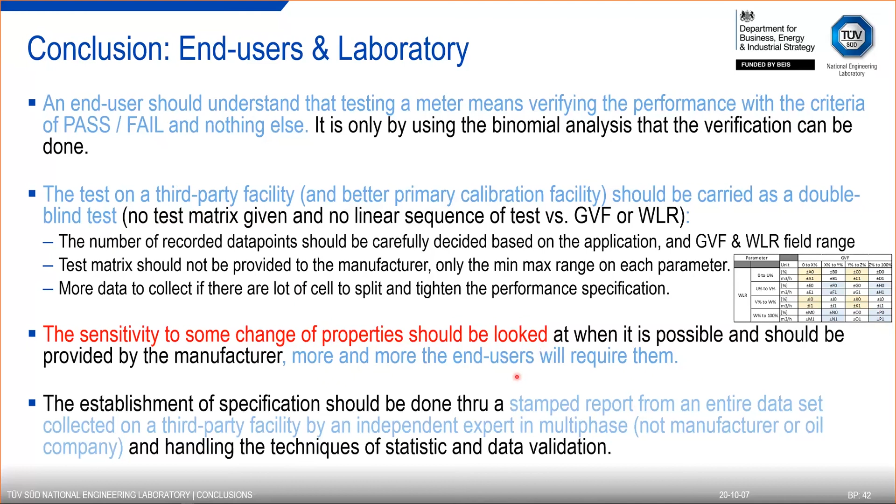In a field, when you are doing a comparison or verification, you need to use a zeta score because the two meters have a large uncertainty associated with each of them. When I say large, it could be 2% for each of them, as opposed to what you will have in a laboratory with 2% on a multiphase flow meter and 0.2, for example, on the reference, which is a factor 10 in this case. In the field, they are comparable, same order of magnitude. You need to do some repeatability and reproducibility. I told you this is very important, and this is what you are using very often in the field if you are in well allocation or a partner in a field between different companies.

Sensitivity needs to be established in a field also. If you have some chemicals, for a given flow rate, you don't change anything except the chemical, and then you can see how the meter is deviating or not versus this injection of chemical. Keep in mind, recording should always be done at the same time, same place, same condition, and obviously without a choke, as I said, between both systems.

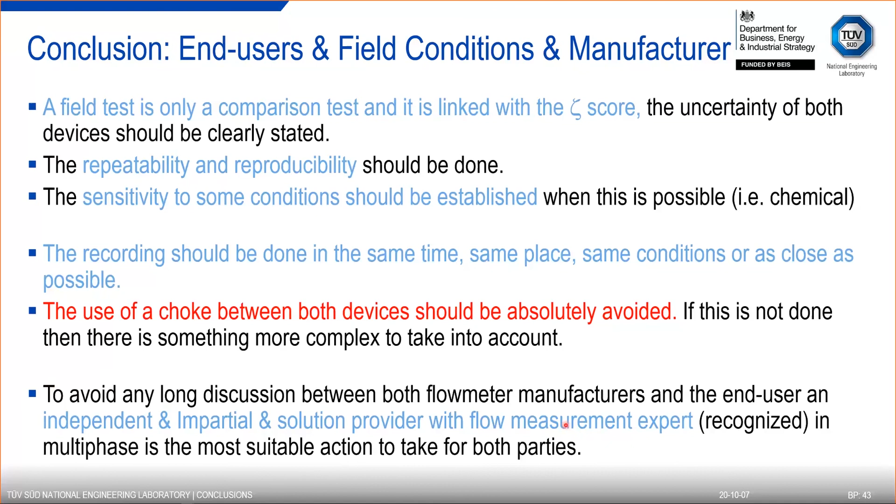I should have highlighted this part here, but definitely I say it: you need to be sure that you use someone who is an expert in flow measurement, and I will say also in uncertainty measurement and statistics, in order to establish a report that can be distributed to both of them. Obviously, this person needs to audit what's happening in the field, and to state clearly, yes, it passed, or unfortunately, it failed.

So we are arriving at the end. Just before a few questions, as I said, in this one hour I tried to summarize a lot of things. One thing which is important: there are a lot of things that I've been hiding, for example, fluid behavior and conversion from line to standard conditions. All these things need to be done and calculated. Obviously, we are capable of doing that. I tried to simplify it and keep it at line condition, as stated earlier.